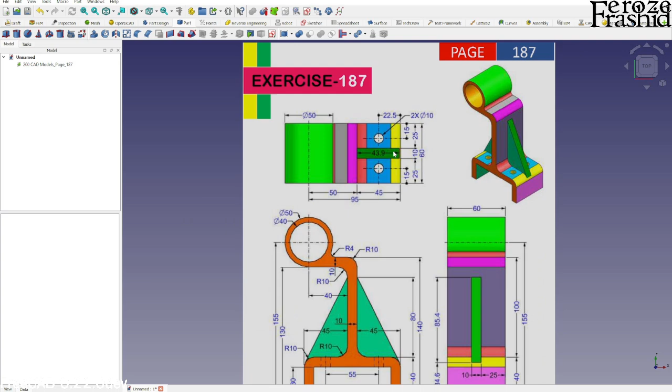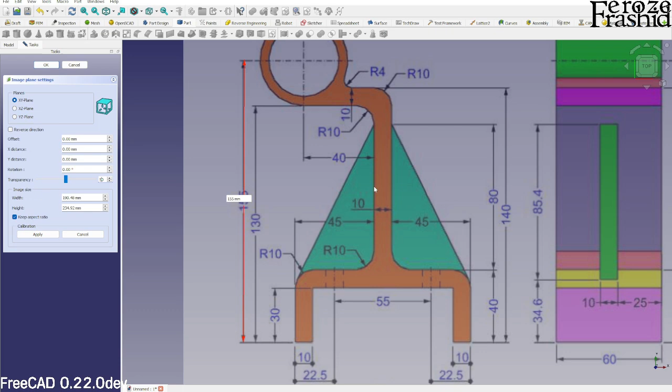Today I want to work on exercise 187, which is a very interesting object. So I want to use this image in the background to help me sketching. Although with this 0.22 version, it is easier compared to 0.21 to draw and sketch without the background image. But since we have it, why not use it, right?

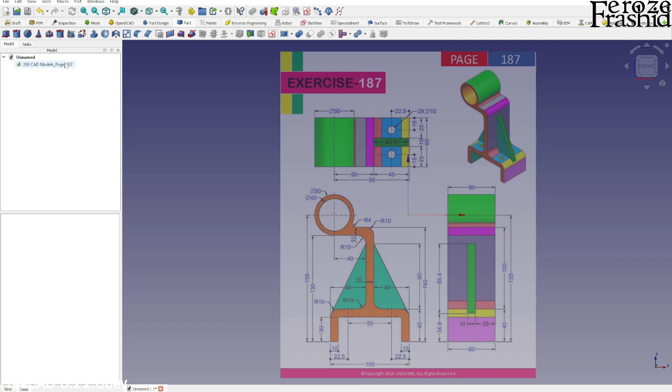So I set it up on XZ plane as you saw me doing that. So this is the XZ plane, that's where I want to start off. So I'll be building the whole thing with one sketch, and then these flanges, these triangular reinforcing plates, we will do that like a second sketch. With that, let's go ahead and relocate the image.

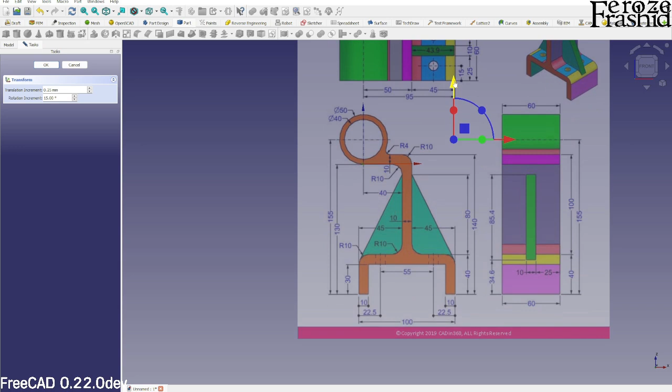Now because there is a tube, my first intention is to actually set everything up based on that one. But do you think that's a good idea? Especially given that on the second item, I'll have to draw this sketch. Maybe on this one, as an exception to my rule of thumb, I will build this model from here in the middle. That will help me sketch things easily. So that's like about in the middle. I'm gonna say good enough. Hit OK.

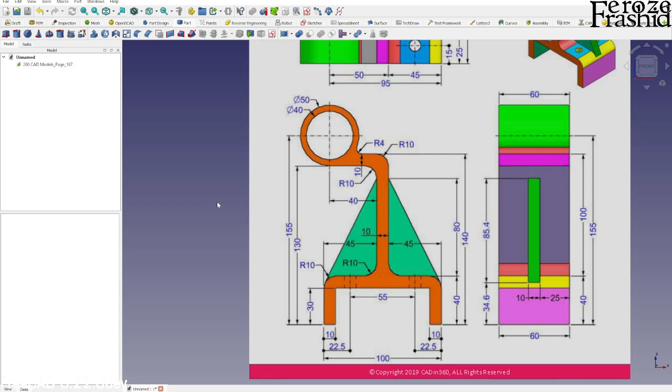All right. Now I want to start sketching on XZ plane. That's where this image is at. So it is important to match the sketching plane and where I want to have this image on. So I'll take the polyline and quickly draw the half of it. So I'll just take this and build the fillet in there.

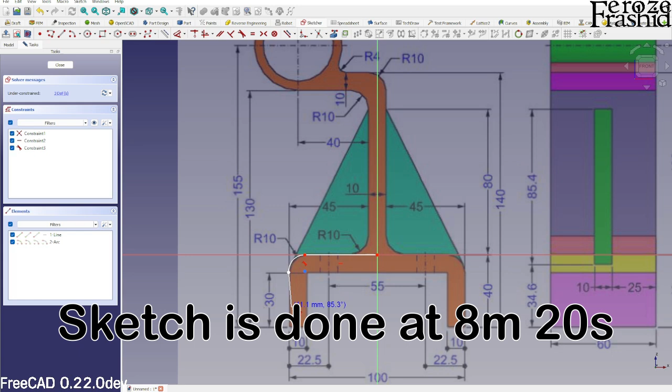So if I can build the fillet within the sketch, sometimes it's not suitable, but when I can, I feel like it's best, given that in the past I have had issues with fillets, and if I have it in the sketching, it's just nothing to worry about later on. One less thing to worry about. All right, let's make these 2 points coincident. Looks like it. And then I'm gonna take everything.

Maybe I want to do it up to here too. So I want to do it up here, right? And then make a fillet between these two lines. So that's like a half sketch which I can mirror over. So double click on one of the lines and then mirror over here. Maybe before I do that, I can actually fix these lines with the dimensions.

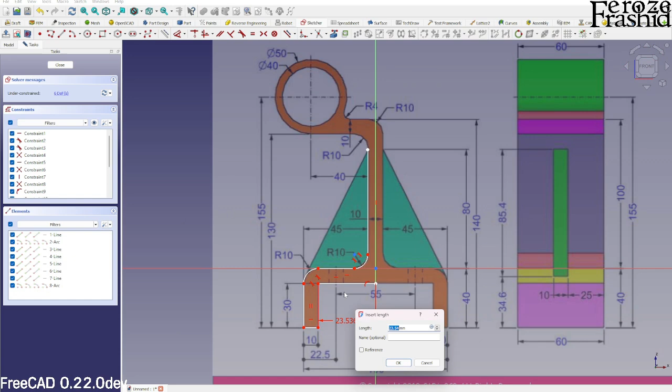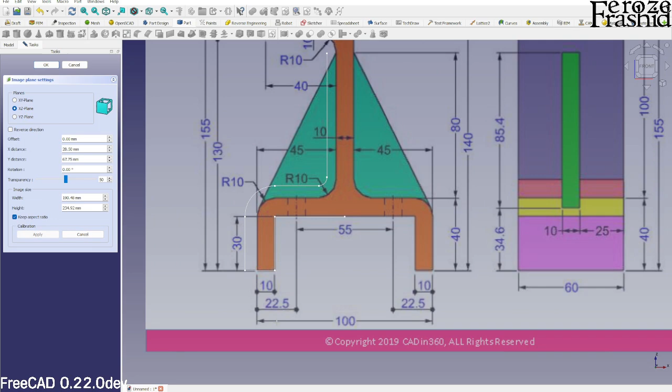So this is right. Let's start with what we know readily. So this is 10. Somehow this is not matching. So let's go verify our calibration. Let's see. So this should be 100. I did not do the verification, the calibration. All right, sorry about that. So everything stays same. I don't know how it happened.

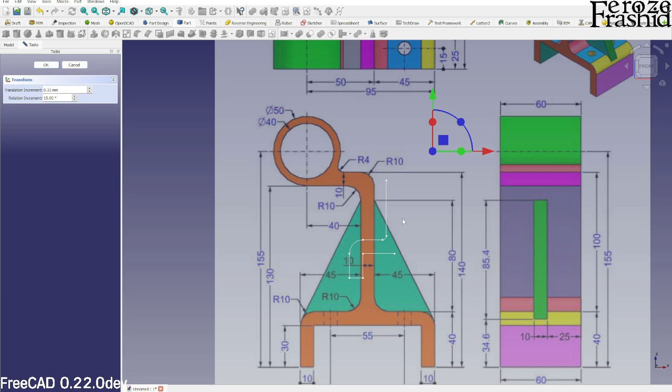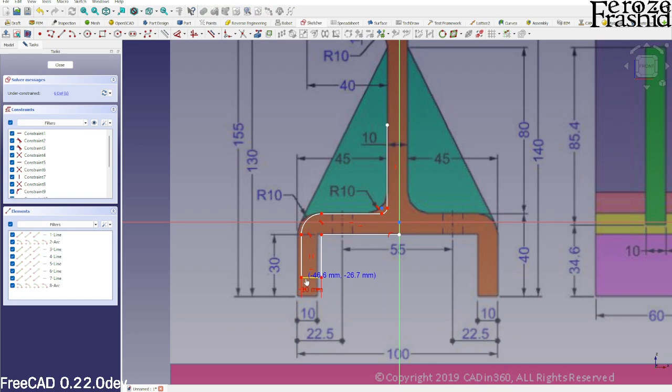And then we'll have to obviously relocate again. So this will be at this point, right? I'm gonna go ahead and do that. Looks like a good match. That should do, right? And now we go back to the sketch and update our things. So this is going to be 40, and then this is 30, and this is 10.

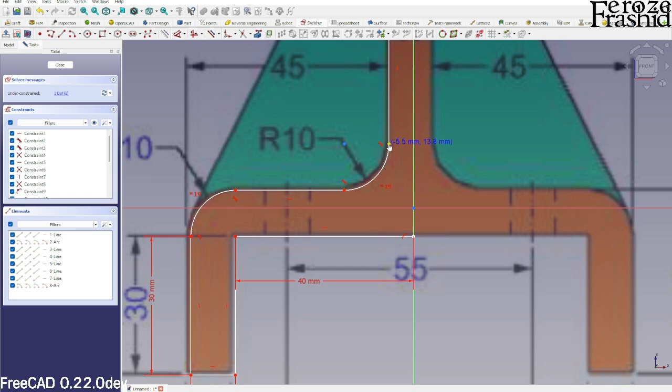We don't have to do that because we already said this is 10 here, and actually we did the coincident constraint here. So that radius, we don't have to do that, but we will have to do this. So what I'm going to do is I'm going to take these two and make it equal, and then bring it over here, right? And pull it all the way and say this distance is half the thickness. So this is going to be 5.

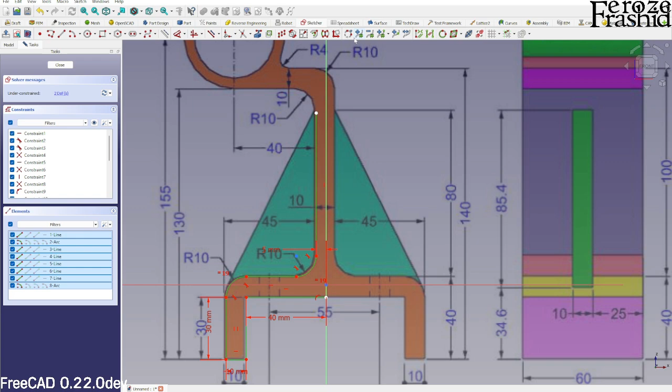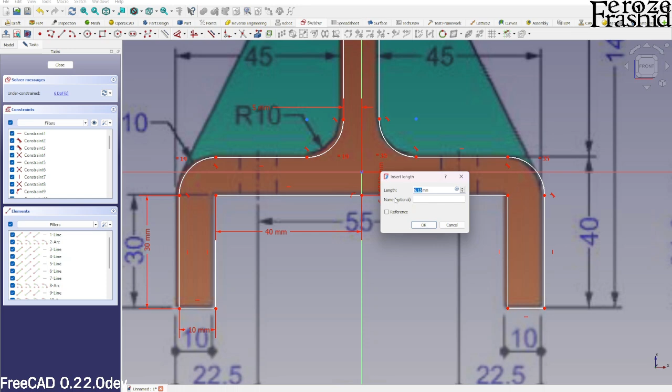Now that I have all these constraints given there, when I copy it over on the other side, they will be retained. So I take this mirror and it will be retained. Only thing I'll have to do is to make these 2 points coincident. All right, and then everything stays at the same point. Maybe I say this is going to be 5, right? Yes, because half the thickness is 5.

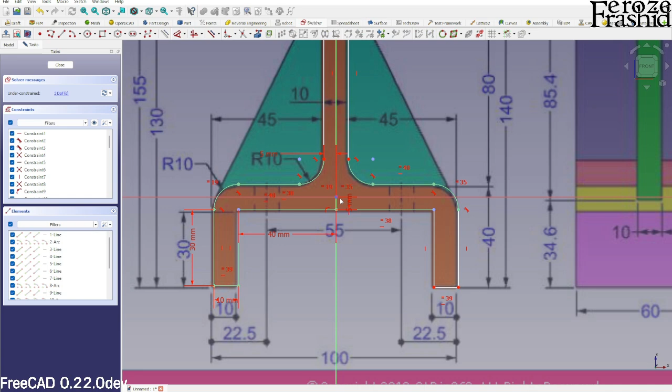All right, and then, oh, I thought the dimension would be retained when they are mirrored over. All right, that's something that I learned today. Looks like the dimensions will not be retained, and I wish it did. Right. And now we have that part done.

Let's go take care of this. So I will take a polyline. From here I want to say M, M, and M, and come here, and then so all the way this is going to be almost a circle, and do another M, M, M. Right. Maybe I delete this and bring this over there.

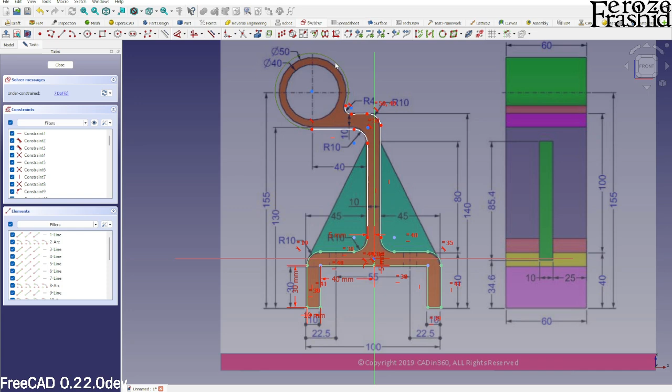So that's C for coincident. So this is going to be radius 10, which is same as this one. So let's go ahead and say E. So that's equal, and these two will be same as well. This is horizontal, and this is radius 25, diameter 50, and then this is radius 4, very small arc.

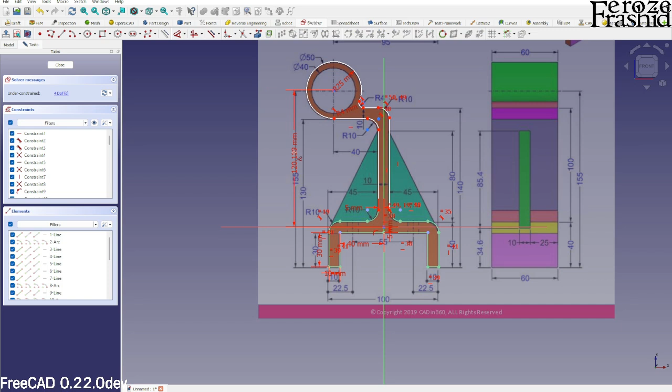And what else? This point, it's moving around. Let's go fix it. So the height of this point is 155 minus 35, so 120. And then the lateral distance is 40 or 45 because this 40 is given from the edge.

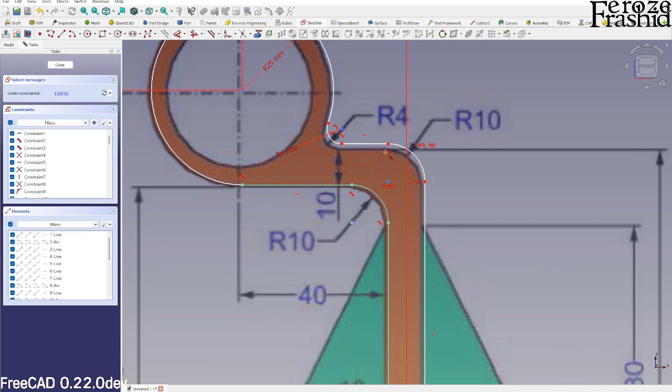All right, we have 3 degrees of freedom left, and one of them is this point. So this is horizontal, and then there will be a tangency, T on the keyboard, between these 2 points. There is already tangency there. We have 1 degree of freedom left. I'm guessing this will be this length, and let's go fix this point. Looks like it has a dimension here, 140, so 105. Let's take that guess. All right, looks like it's a fully constrained sketch.

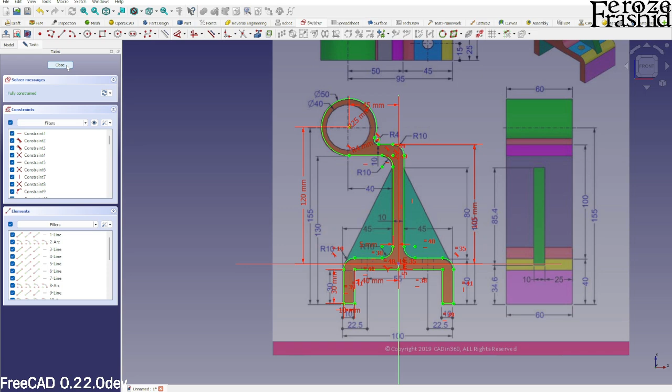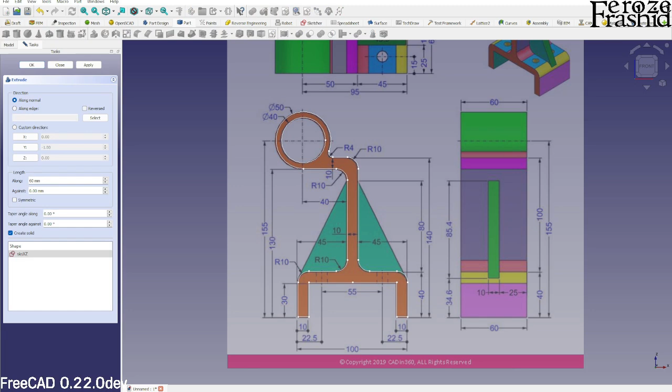Took us a minute, but we want to have it as a tube, so that's diameter 40. All right, we got that sketch. So this is, I'm going to say, sketch XZ plane, and then we want to extrude that for 60. So this says how much we should extrude it, obviously 60, and symmetric, and hit OK. Very cool. Now on to the next phase.

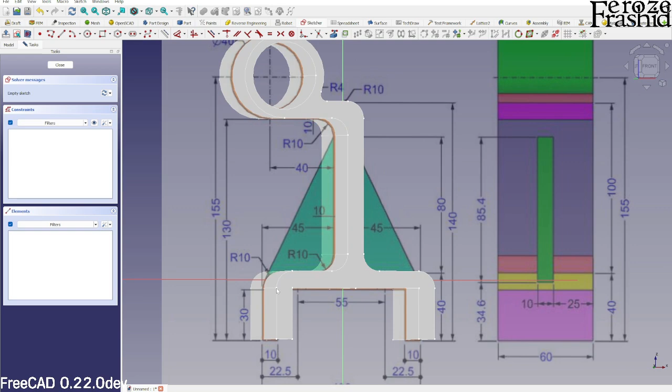I want to draw another sketch on XZ plane, and then notice how this line comes all the way down to this point, to this edge. So this axis cross will not do us much good. What I want to do, I want to take a reference of this line, this edge, and this edge, which converts to a dot on this face. And I think I'll have to take reference of this edge and this edge as well.

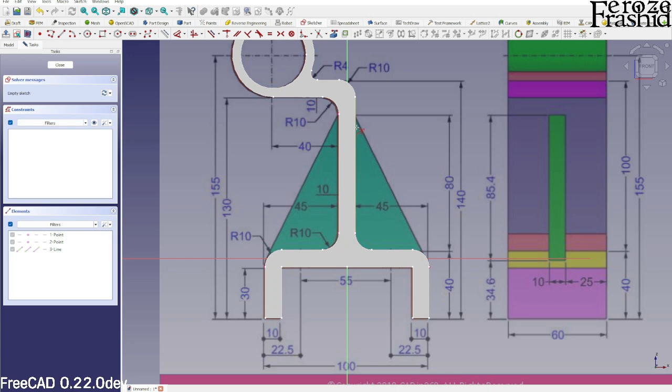Right, now I can go ahead and turn on the section view, and then let's draw from this point. So maybe we should have set this axis cross initially at this point. That would actually help us in this phase. Not a big deal, right? I want to go here and bring it over, not on that point. I just want to keep it on this edge and then bring it here.

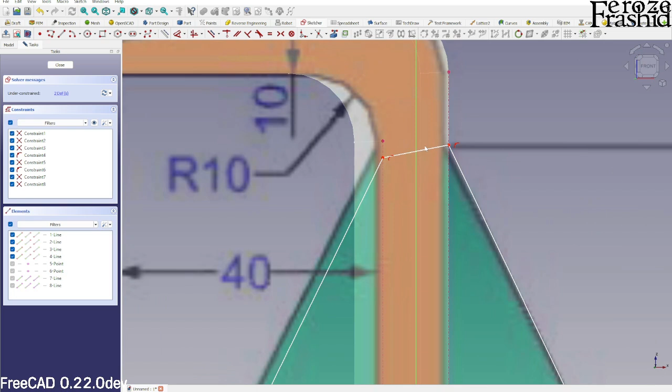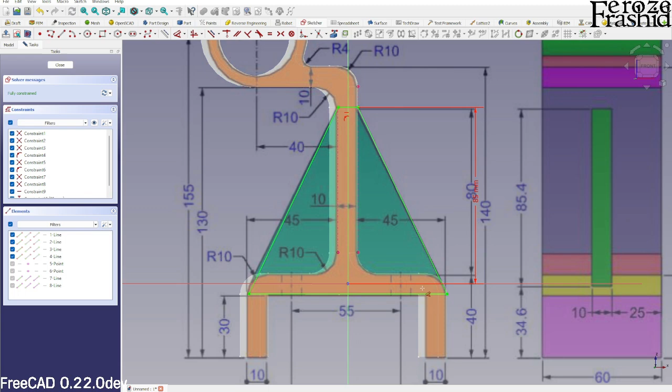Now let's go ahead and make this horizontal, and then this point on this vertical axis is 80 millimeters from this one, so it's 10 millimeters. That would be 70, I'm guessing. Oh, now it's 80, I'm gonna say 85, sorry, 85, because it is halfway through this 10 millimeter. And that's a fully constrained sketch. Let's take a look at if it is coming down too much. It's not. So we can extrude that.

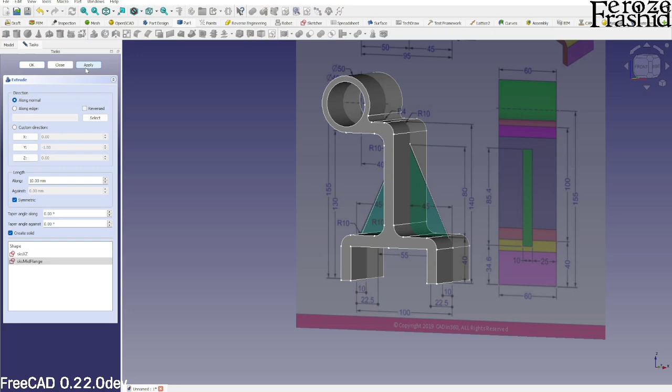So this is the mid flange, right? Or like a stiffening or reinforcing part. And that is to be a 10 millimeter pad, symmetric. And that's our object. All right, no, hold on. That is not our object. See how this edge comes around here? I'm just wondering if instead of taking this point, it would be actually tangential to this edge.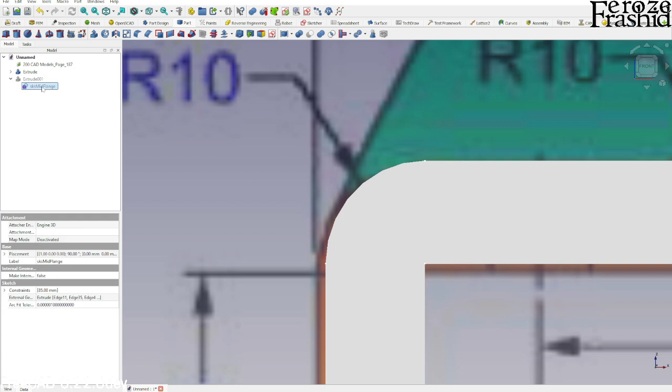So let's go back. Yeah, no, that's obviously not it. Let's delete this point, not the entire line, and delete this point. Now it is moving freely. So I want to take these 2 points and make them coincident. See, it didn't work. Take these 2 points, make them coincident, and then take these 2 points and make them coincident. And then we can say horizontal. Now we can go.

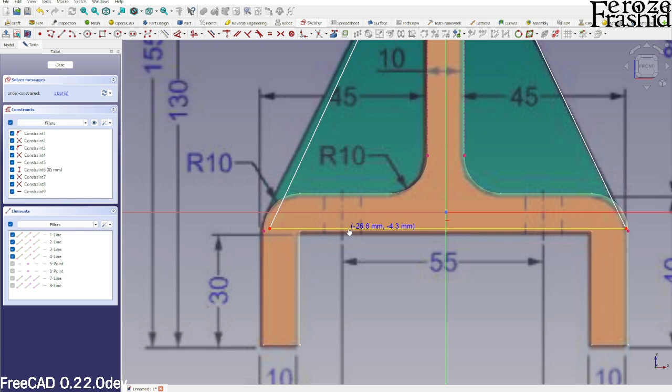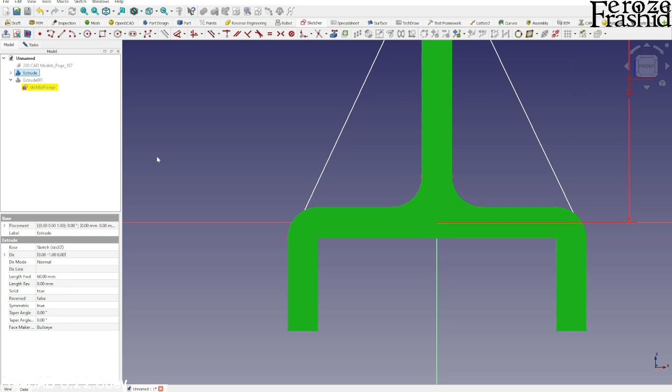What happened to that reference line? Let's hide this and hide this. And there should be 2 reference lines, right? We did take 2 reference. We did not. Let's bring the axis, this extrude back, and then I want to take this edge as a reference line and this edge as a reference line, and then hide that.

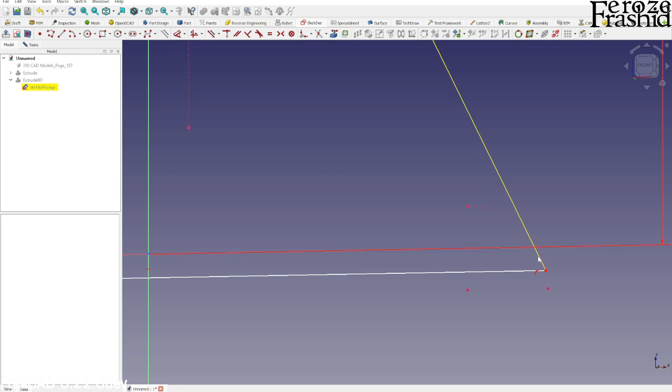Now I can go say this point is on this curve C, right? So take this point and this arc and C. All right, and do the same on this side. But I wanted to take this point and this arc C on the keyboard, and that's point on line constraint. And then I want to go hit T for tangency and take these 2 edges. So that is one way to fix it.

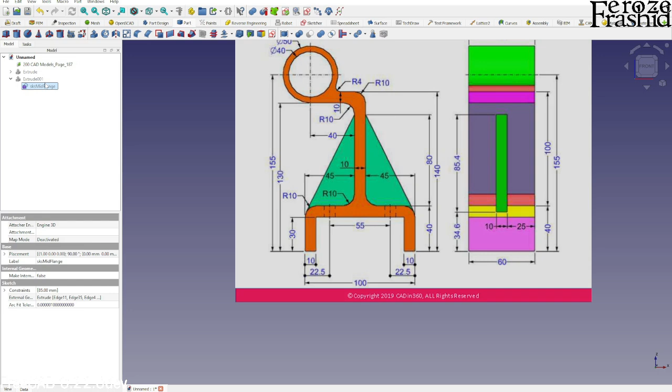All right, and now one more thing to consider. This 85 is from this axis, which is good. So we take this, and then the extrusion is there. Now it looks like what it was asked in the technical drawing. So let's put them together as a fusion and say example 187 done.

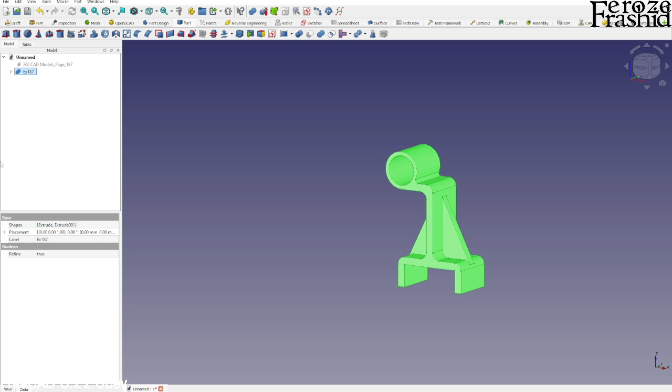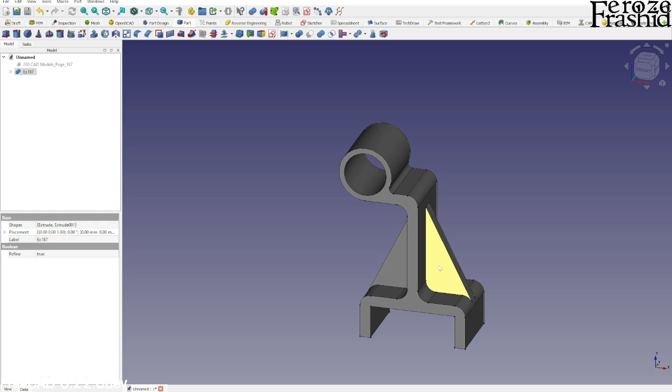Now I have a question for you. If you consider this model in real life and say this is a fixed surface, right? And then you have a cylinder going through here which is carrying load. So the load will be applied on this edge. Would you say this is an optimized design? How do you feel about these 2 flanges only covering this stem, and this part is like cantilever up here? So what do you feel about this model? Do you think it's optimized? Do you think there are more ways to improve it? Let me know your thoughts.

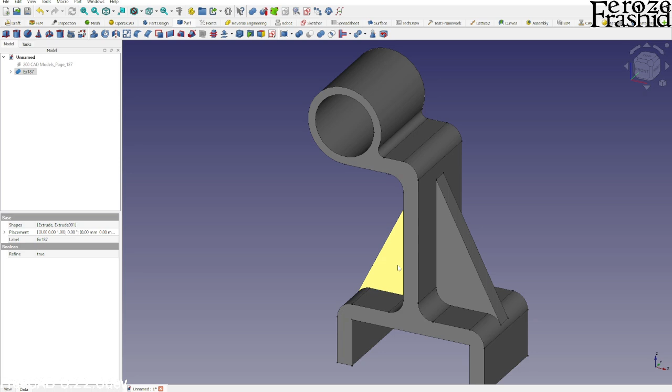I want to do an FEM analysis on this model and an optimized model at a later date. So let me know what you think about it. In that case, I'll be looking forward to having some suggestions from your side on how to optimize this model so that I can do some comparative analysis on FreeCAD FEM workbench.

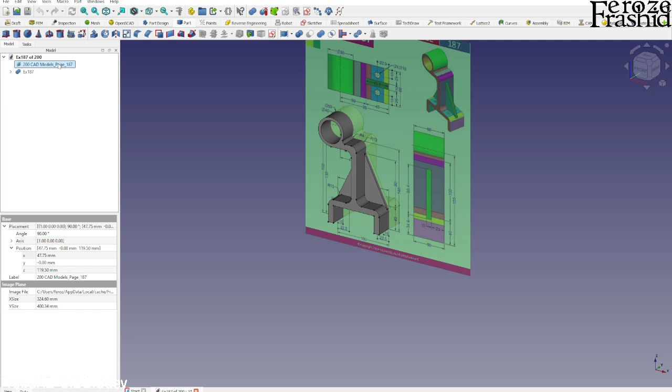Looks like I forgot to add a couple holes at the bottom. So let's take a quick look at what we can do. Let me move it on the XY plane. And here our axis cross is right here.

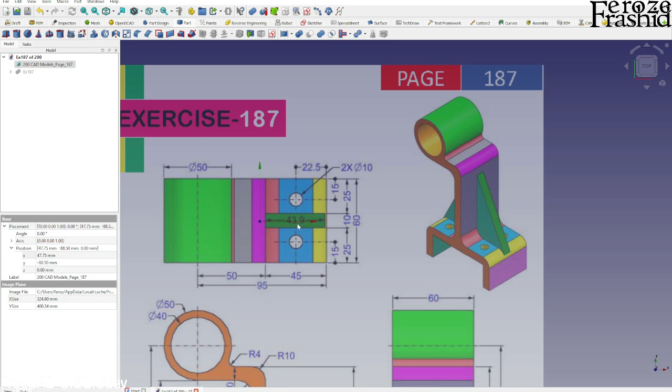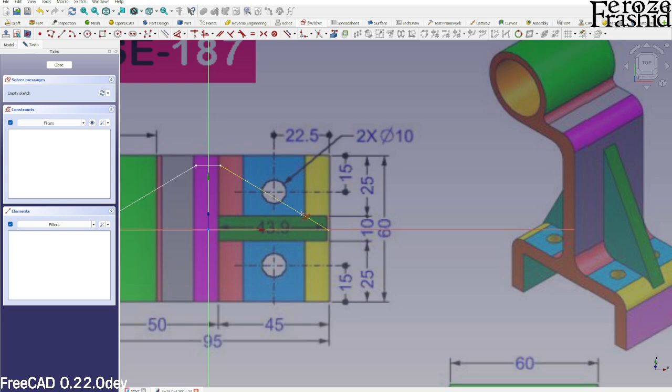The distance between this point and this point, maybe I take this sketch as my reference and start a new sketch on XY plane. And then I take reference of this line, so that will give me the end point. And I'm guessing the other side will be symmetric to it.

All right, so now I can go ahead and make a hole here, 10 millimeter diameter. And then this distance will be 22.5, right. And then the height is 15 from the outer skirt. We don't have a reference to that. I think that's 15 from this base. Yes, that's 15, all right.

And now we can take these and make an array of, so 1, and then we hit R one more time, and then take this center, come here, about here, and then move it here. So that's an easy copy. Now I can go ahead and actually fix these.

So this will be vertical, this two will be vertical, and then these two will be horizontal, H on the keyboard, and then these two will be horizontal, H on the keyboard. And then I can go make it symmetric by this axis, I'm gonna say. Somehow it didn't stay, so this is going to be vertical. All right, that's too much. Okay, so this, not vertical, this is going to be on the same horizontal plane.

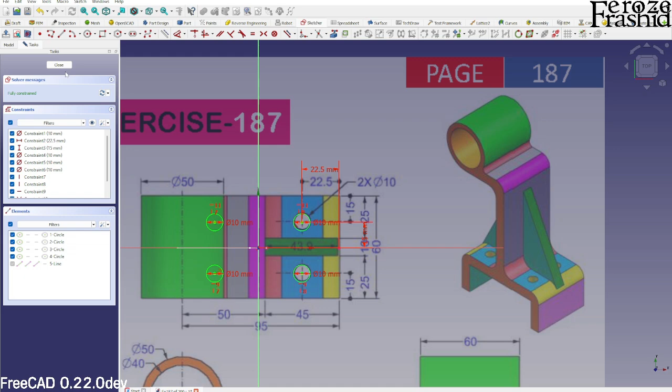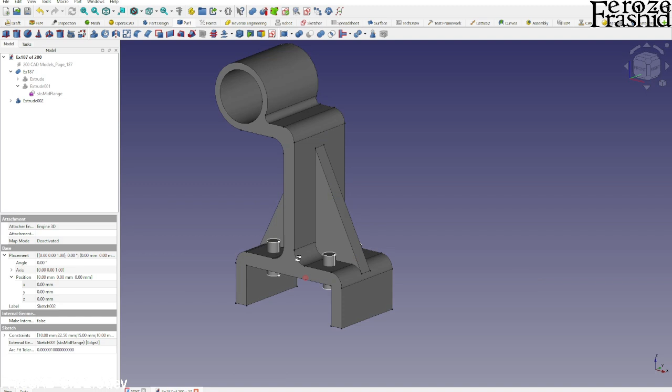All right, so we got our sketch there, and let's take a look at the object, and that sketch is sitting, looks like, in the middle. So we'll have to extrude it both up and down. So extrude that for say 25, for example, and then make it symmetric by the plane. And we can see that's poking out on each side, and then easily make a cut.